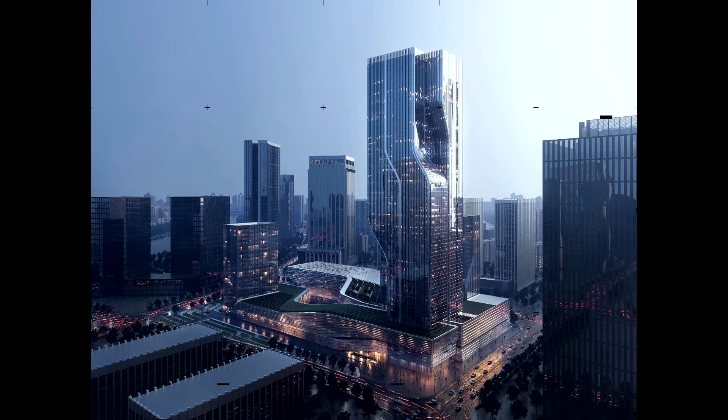And that is what I call a catalytic form, a design element that accelerates changes in the larger architectural design and its context. I will now bring you through a series of our projects exploring this idea of the catalytic form at different scales and for different project types, looking at seams and details in each one.

The first is Iwi Orthodontics, a 6,000 square foot VIP orthodontic clinic located in Omotesando, Tokyo, Japan. A vibrant and sophisticated area visited by both locals and tourists. The functional requirements of the project were complicated, and the clinic is situated in a neighborhood with stringent building codes. Our intention was to integrate the requirements and technicalities into a project with a coherent vision and elegant aesthetic.

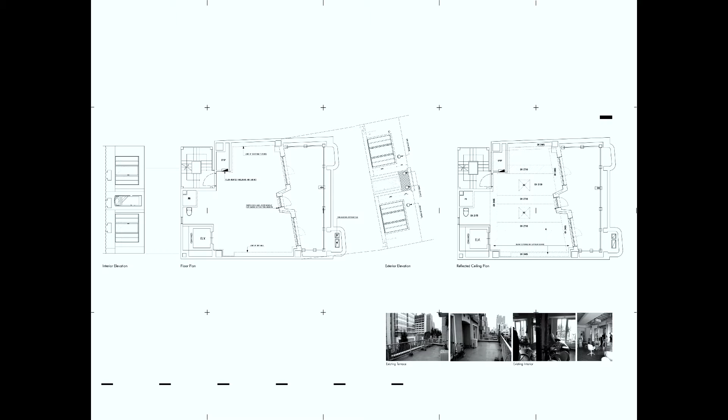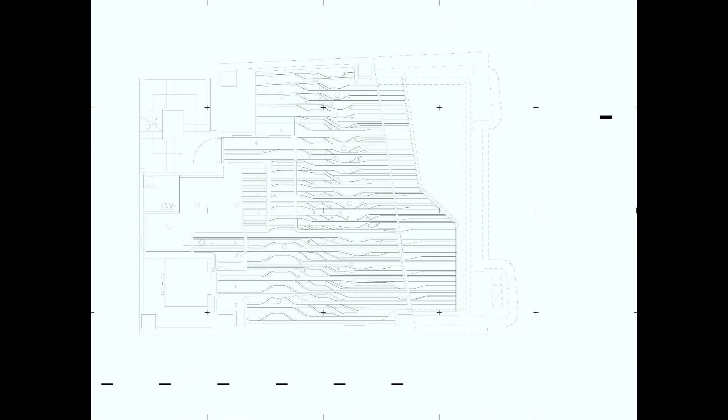Within our practice, we are obsessed with intricacy, assembly, and materiality. We have always been interested in the role of the detail in the production of an aesthetic goal. Rather than beginning the project with a form and articulating it, we conceived of the project as a series of vectors wrapping the floor, walls, ceilings, and site, which are used to define detailed material connections and assemblies. By subverting the design process, moving from detail to form, we arrive at what we hope to be novel and unexpected solutions. Here is a detailed drawing of the orthodontic exam room. And this is the reflected ceiling plan of the clinic.

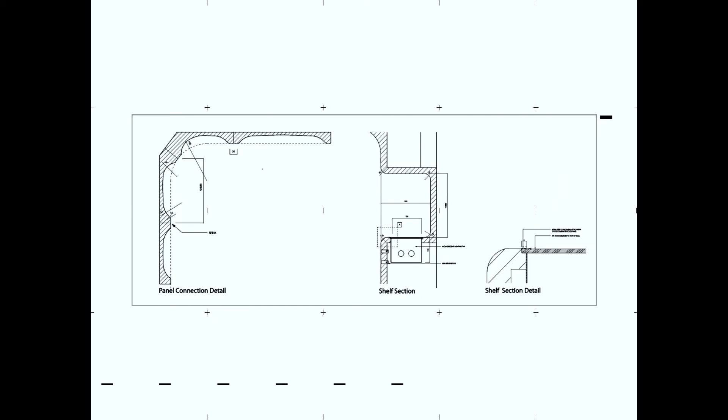The clinic is structured using steel and panelized with calcium silicate panels, free to move in the vertical dimension in case of earthquakes, that simultaneously operate as cavities for LED lights. The ceilings are milled calcium silicate panels that wrap the walls and meet more durable milled engineering wood panels. This is a mock-up of just a connection between the floor, the ceiling, as well as the LED. And as we move through, the seams are integrated with the furniture, which has the same form as the wall panels, but is made of soft foam wrapped in microsuede.

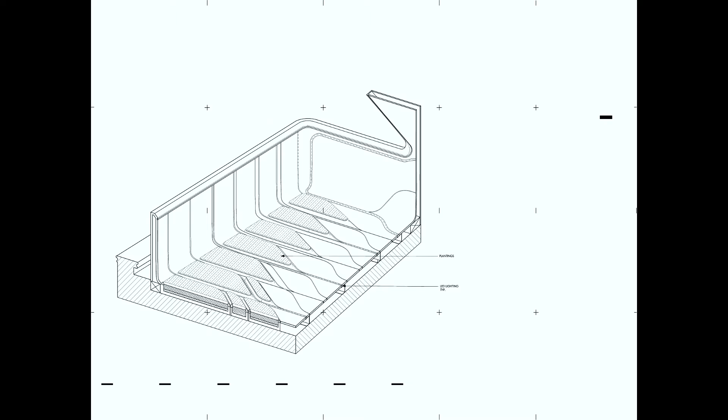So the spatial limitations that are characteristic of Tokyo in general were a determining factor in a strategy to increase the clinic scale by incorporating the exterior balcony into the interior space. And the seams in the balcony floor are porous to allow for the water to flow through the panels to the existing drain, which is at a lower level. The enlarged experience was achieved by adjusting the floor level of the interior and exterior balcony to be coplanar, creating continuity from inside to outside. And the interior ceiling also extends to cover more of the balcony, amplifying the extension of space.

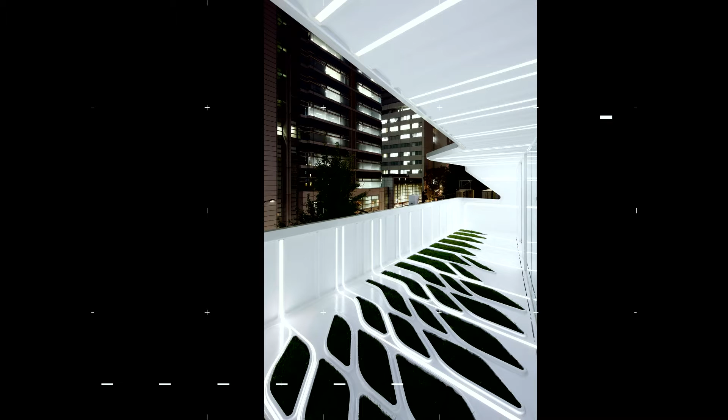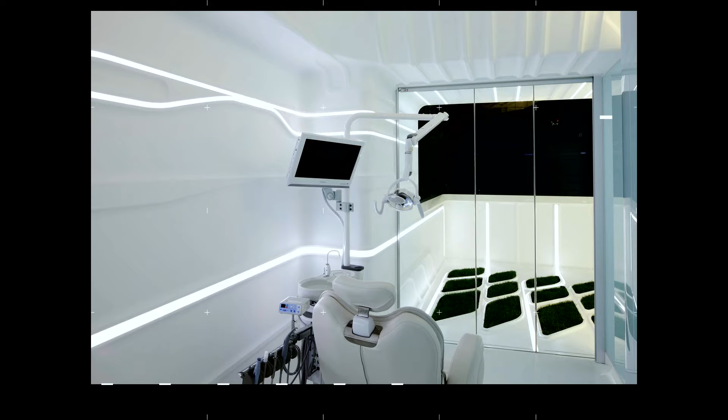Our overall design intention was to integrate the complexities of the clinic, HVAC systems, lighting equipment, and space through a few key details, which when repeated and varied across the project, drive an aesthetic sensibility. The overall variation of the project is guided by proportionality, and the magnitude of variation is maintained within an aesthetic sensibility.

The lower limits of variation were set by the amount of variation necessary to have a different experience in each clinic. Sinuous lines map the culmination of the two limits set to variation. While the white color allows the pattern to be seen most clearly and is animated by the color of the sun through the day and night, month and season.

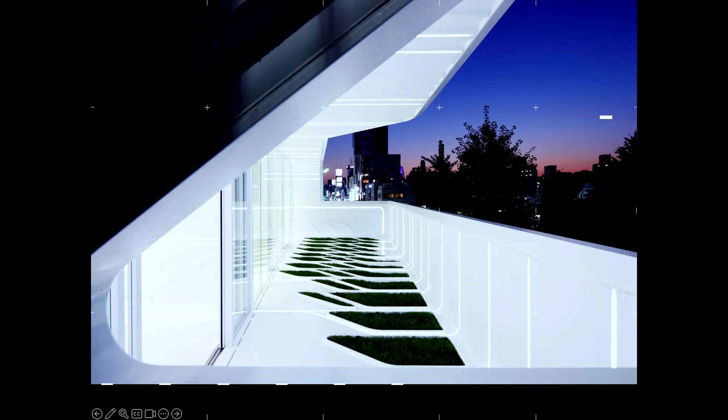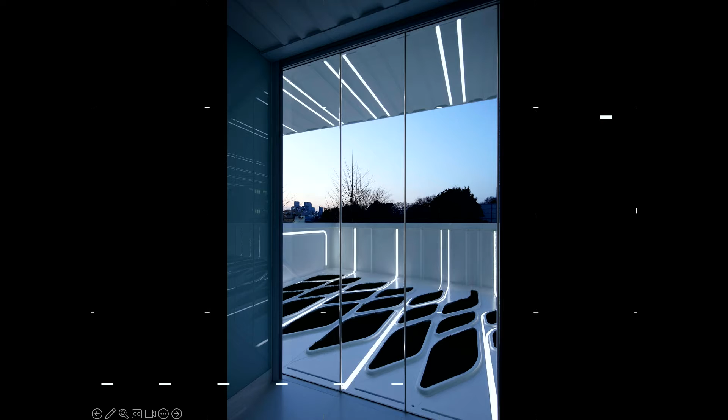And if you are familiar with Tokyo, the building in the back is the H&M headquarter building. So it's just adjacent to that street and location of H&M. So what happens is that this allows for each experience of visit to the clinic to be a new one for patients and diversifies the space for daily workers.

As the patient travels towards each private clinic, the experience is designed to be more intimate. It compresses, and the patterned glass containing multiple opacities shimmers to create an atmosphere similar to a wall of trees with the leaves moving in the wind. The only light comes from the adjacent spaces, which helps animate the space through reflection and transmittance. The atmosphere is stimulating, yet comfortable, with green glass used for the interiors and incandescent light, which softens the experience.

Here, I think you can see quite clearly the power of the seam. It can absorb all sorts of complexity, from material transitions to lighting, to embedded utilities, to seismic tolerances, and more, while driving the aesthetic of the project. This alters the logic of hiding all the necessities of architecture under the smooth and seamless form in favor of embracing complexity in the end result.

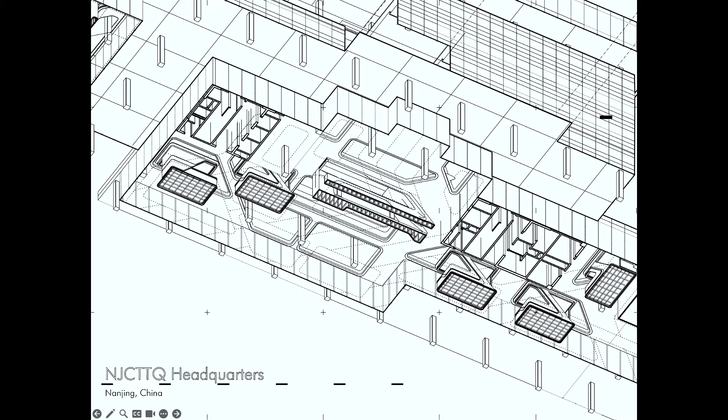The next project I'm going to share with you is CTTQ, which is a pharmaceutical company in Nanjing, China. It's a headquarter building for them. Seams play an integral role in this project as well, but at larger scales.

Our design for CTTQ is kind of a complex that sprawls across 6 existing buildings and 1.5 million square feet to diverse functions, including an educational center with auditorium, research and development facilities, laboratories, corporate offices, meeting spaces, including VIP and boardrooms, and a cafeteria that feeds 1,000 employees a day.

I will focus on how we use seams to connect and nest discrete interior architectural elements within and across the existing envelope. In approaching the project, we conceived a series of details and developed them into tailored forms. These forms are disjunct from one another, but connected through various independent devices such as floor seams and ceiling patterns. Spatial divisions created by the interrelated forms break from the orthogonal column grid of the existing architecture.

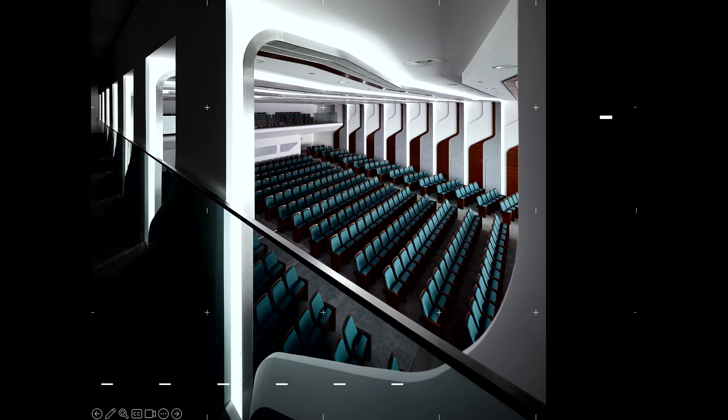As such, the construction of the building may be the same throughout, but the aesthetic goals, details, and material assemblies shift as needed. We use different methods to achieve our goals, including the development of details that conceal or reveal edges and joints. Details are crucial as they control the aesthetics of the material assembly and form. Seams accentuate or diminish the assembly. Materials nest into and layer on top of one another.

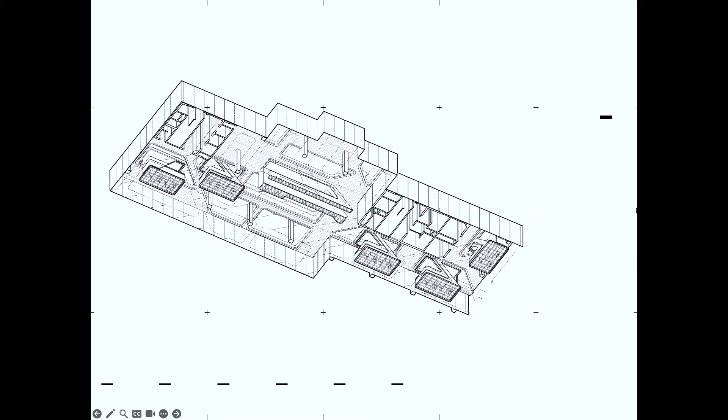Details are developed into objects, and these objects are then inserted into specific spaces. The exact techniques of assembly vary, but the goal is the same: to achieve a visually cohesive aesthetic composed of details that are both different and disjunct. This goal was achieved in 5 ways for CTTQ. The interview booth, for example, uses 4 disjunct materials at different scales. Seams move across materials and material assemblies instead of delineating them.

White Corian is nested into a frame of engineered wood. The booth is nested into a cove in the gypsum board ceiling. A gray composite is layered over the surface with an LED edge that makes it appear to float. The cove's interior is wrapped with engineered wood that connects to the engineered composites of the booth frame, but also acts to conceal the lighting and mechanical systems. The composite material reappears in the interior of the booth as a sound absorption material.

The continuity of the booth is achieved through seaming details. The seam is indifferent to changes in materiality. I think that's really crucial in this project. It moves from the gypsum board ceiling, wraps around the engineered wood and gray composite of both walls, and continues to the carpet covering the floor.

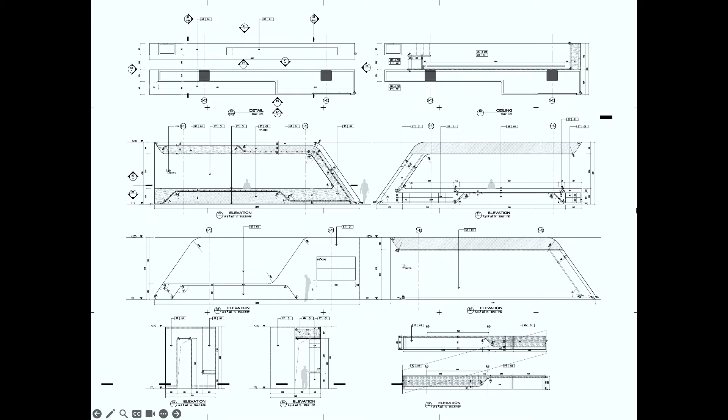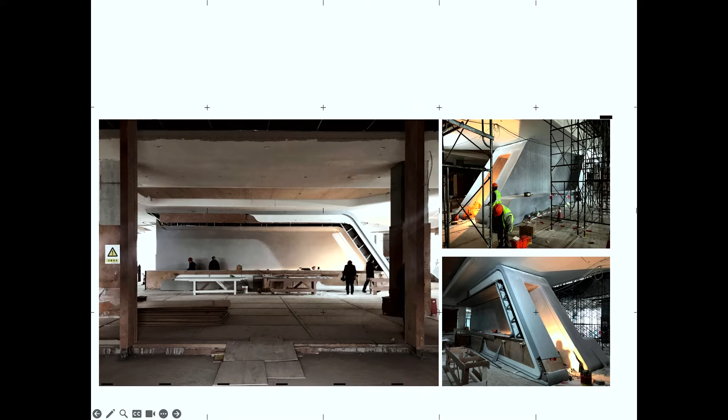The reception desk has the same material palette as the meeting booths, but is configured differently. The details of the reception desk reinforce the aesthetic theme of the project: materials nested into one another, revealed through precise detailing. And what is resultant is that the overall mass of the desk is set in contrast with the lightness of the engineered wood paneling and enhanced through a concealed LED around its edge. The thin 3/8-inch Corian cradling the engineered wood intensifies the relationship of the wood to Corian itself.

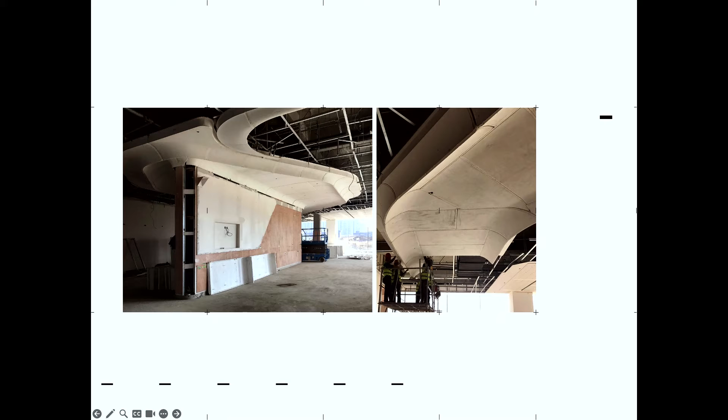Seams are also used to separate the same materials in different ways. For example, in the gallery space for exhibitions of CTTQ's products, the seams of the ceiling move across the seams of the assembled glass fiber reinforced panels. So the assembly is in one direction, the seams cross the direction to remove the knowledge of how it was built and constructed.

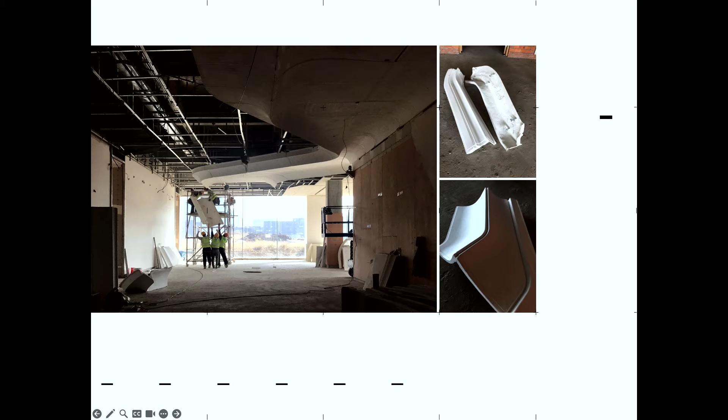The ceiling and floor details produce a floating effect, giving the space a light and soft yet tailored quality. And the resultant is what you see here. There are clear moments of continuity through the curvilinear geometry, but also moments of discontinuity where the walls disrupt the flow paths and create moments for display and observation.

The ceiling wall connection details are key to the disjunctive quality of the space. 4 walls delineate the gallery space, each of which has a nested backlit display box and acts as a gallery display space. The section of the ceiling has 2 mirrored adjoining fillets separated by a distinct groove, which creates a shadowy transition between the wall and the ceiling.

This, along with the flush lighting detail, its adjoining seam, and a larger concave section of the ceiling reinforce the nested quality of the gallery walls. These details work to both emphasize the walls as individual objects inserted into the space and enhance the performance as exhibition areas.

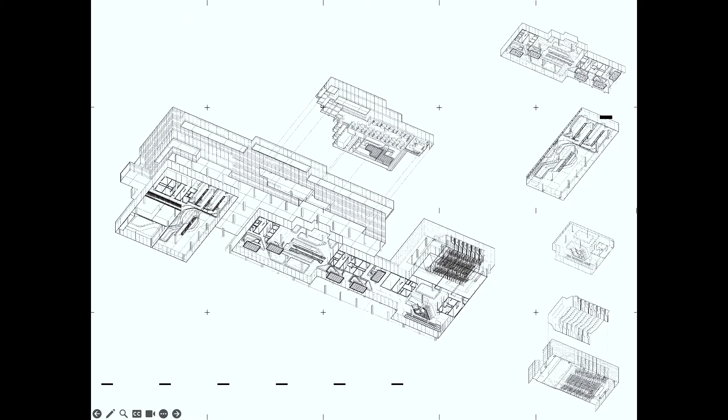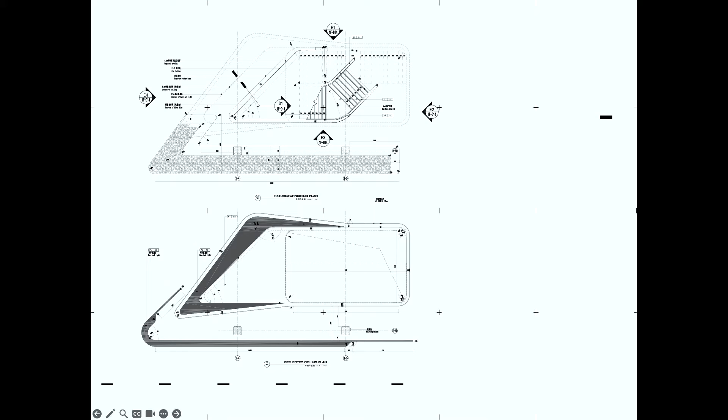And now we move to a very important part of the project because it's the connector between a lot of different spaces. And here, the seams scale up to form monolithic volumes nested with different materials. The stair that connects the main lobby to the training center is a large monolithic form, prefabricated off-site in one piece, and then installed in the space. The handrail is carved into the interior of the form, as can be seen in this mock-up image.

Three seams of varying widths located on the ceiling enhance the form's presence in the space. A fine seam of 3/16 of an inch highlights the opening of the stair. A wider seam of 3/4 of an inch masks linear diffusers, and the largest seam of 1 inch houses a light fixture that cradles the stair and nearby bench.

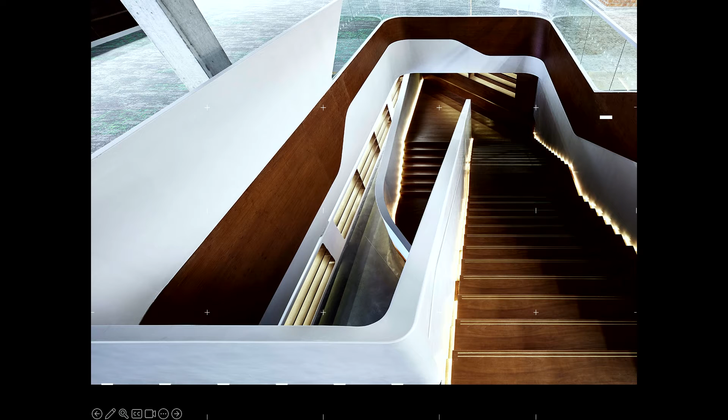Wood stairs are inserted into the interior of the monolithic form. There's a reveal designed on the edge of the stair for LED lights. And this you will see a little later, but it's an important effect that we're trying to achieve. Wooden bookcases are nested within and on the sides of the larger form. The wood profile on the perimeter of the bookcase is concealed in order to emphasize the nested quality of the wood. The stair and bench allow for the nesting of materials to amplify the space's larger volumetric qualities.

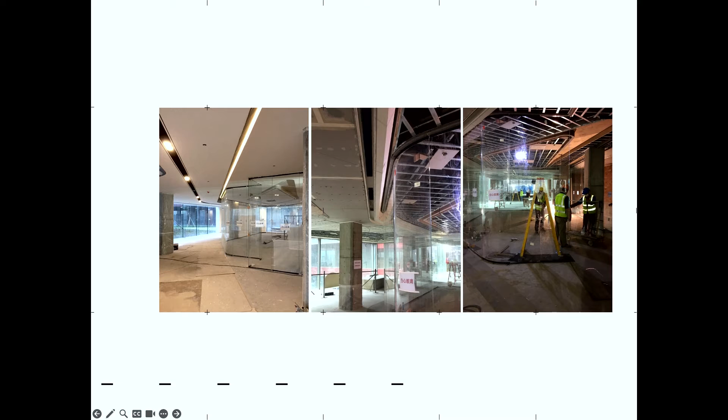Seams also shape spaces. For example, cast aluminum inset seams are used in the Research and Development Facility to separate the black and white micro-terrazzo flooring. These are mirrored by wide black seams on the ceiling, flanked by two finer black seams that contain lighting fixtures and linear diffusers. The floor and ceiling lines delineate the disjunctive office spaces and conference areas around them.

The same aluminum floor seams are used to formulate the edge of the material change between hard micro-terrazzo and soft carpeting. The floor and ceiling seams shape the elliptical spaces around them and create a sleekness that is meant to reflect the progressive nature of the Research and Development Department.

As the floor material changes, the ceiling lowers and changes in material from drywall to acoustic panels for open offices. And the micro-terrazzo floor continues and stops at the edge of the conference room, which is made entirely of flush abutted glass panels to accentuate its shape and object-like qualities. The glass conference spaces of the Research and Development Center are used to break up the open office spaces, and the slope detail around these spaces reinforces the reading of the glass conference spaces as forms nested into the ceiling.

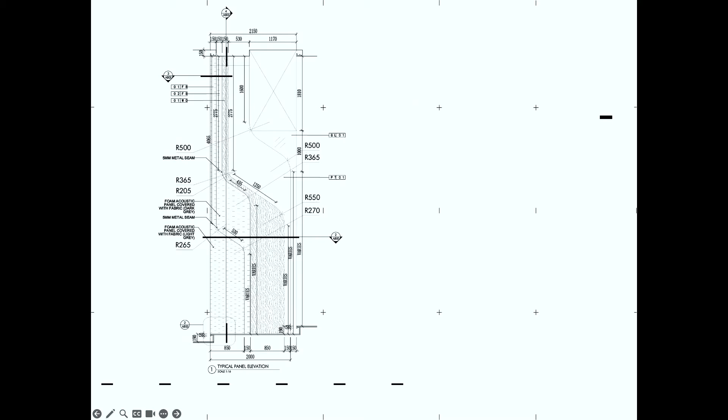So the long axis of the auditorium is shaped for acoustic optimization. The short axis has been broken down through material striation, moving transverse to the direction of form. The material striation is composed of bands of wood panels, fabric acoustic panels, and gypsum board. The drywall is flush with the gray fabric acoustic panels and abuts the wood panels. The scale of the gray panels is broken down by an additional seam moving vertically and parallel to the shape of the panel.

The seams continue onto the ceiling, where the distance between them is reduced, and widened again where they meet the panels on the opposite side of the auditorium. As the seams move down the wall and meet the floor, they continue and separate the hardwood from the carpet floor. This detail is multiplied 7 times and is highlighted by continuous strips of LED light. Each striated section is offset by the height of a stair. Each stair offset allows the ceiling to house lighting, ventilation, and acoustic components.

Repeating the section 7 times creates the overall visual impact of the auditorium being spatially disjunct in longitudinal section, yet aesthetically cohesive in material composition. And this is a view from the balcony spaces looking back into the auditorium, and a lot of the VIPs actually in China inhabit this space.

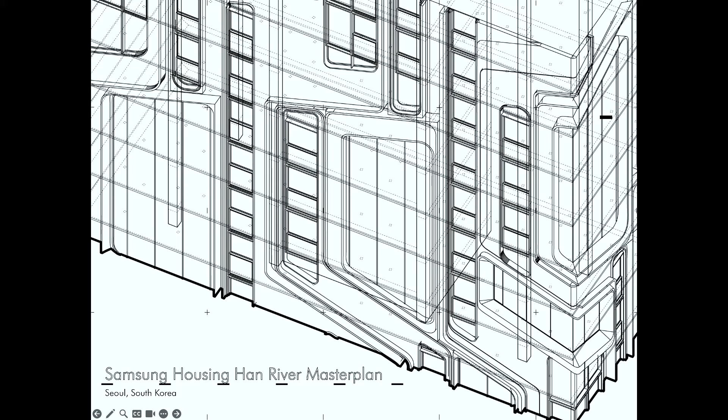One specific area of interest we have been invested in, really for complexity and modularity, is urban housing, as explored in this project. With a fresh focus on the detail, architecture can move from intricacy of assembly and nuanced spatial design to the creation of whole new architectural typology and construction workflows, or the reconfiguration of existing ones. So we were asked by Samsung Construction and Trading to formulate an 18-building master plan along the Han River in central Seoul, using predetermined building types initially created for their housing designs.

The challenge was to create significant differences between buildings across the master plan while maintaining specified building forms. This is in strict contrast to the monotonous and impersonal 20th century mass housing developments that typify mass housing in Seoul. We had several constraints, including zoning codes, unit sizes based on tax codes, and the need to create a unique facade for each building.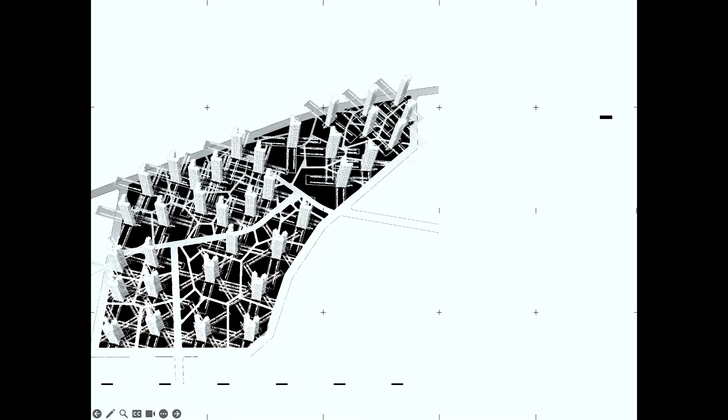In the spirit of aesthetic intervention, we sought to use a highly graphic and variable facade strategy with a deep investment in architectural performance to reconfigure the typology. A novel approach of detailing and prefabrication was essential in this respect. We sought to create a design sequence that breaks with the homogeneity of the original housing design while enhancing its attractiveness in terms of cost effectivity and construction efficiency.

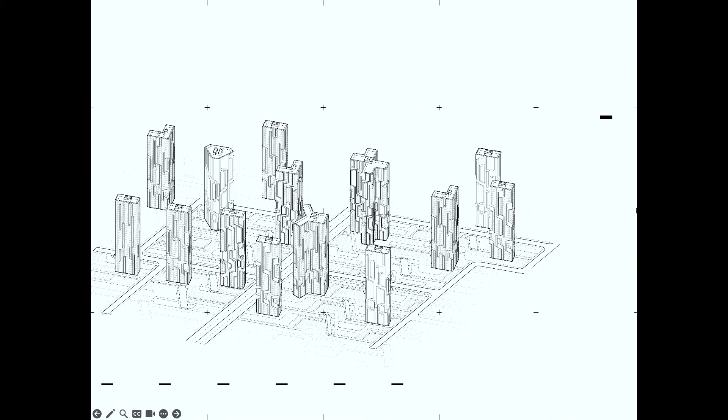As in the CTTQ headquarters project, this project is developed at several scales. The project seeks to achieve a visually cohesive aesthetic composed of details that enable different performance and programmatic criteria. This was accomplished in multiple ways, ranging from facade details to the overall master plan. To start, the facades are composed of 10 unique prefabricated frames, each with its own architectural detailing. Frames sit flush, are recessed, or protrude from the facade.

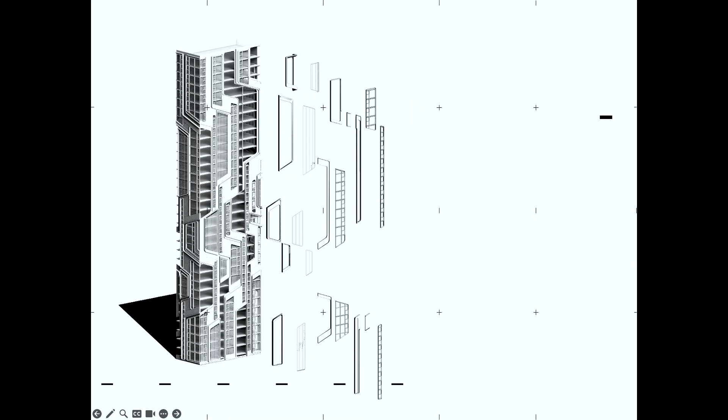The edges of each frame are either wide, narrow, or bend and become an angle. Some frames contain a seam, making them appear bifurcated. Other frames sit adjacent to or on top of one another, creating a reveal between frames of different widths. Multiple frames are also grouped together in larger frames to create nesting effects.

Further, the materiality of each frame changes depending on its width relative to other parts of the facade. If the frame is extremely wide, a seam is carved into it to give it a narrower reading while visually reinforcing the metal on the facade. When we group multiple wider frames together, we use metal as the facade material, making the building more opaque.

At the other extreme, we use very thin frames assembled next to each other to develop the most transparent parts of the facade. As frames oscillate in width, the glass to metal ratio is altered, which is aimed at giving an overall sense of cohesion and aesthetics to the building. Frame components and glazing articulate movement across the facade to enliven and enrich the generic form of the building footprint.

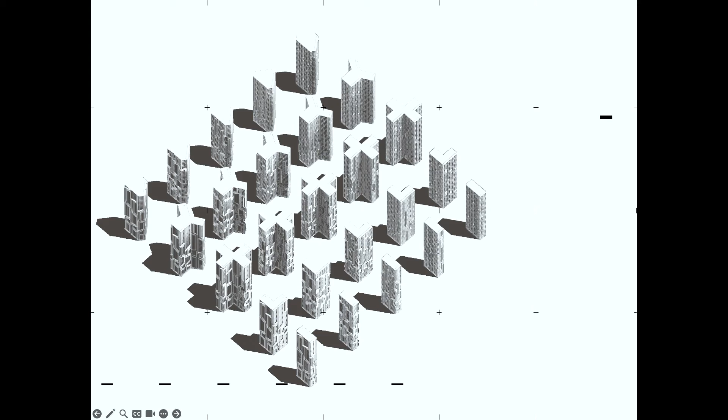All of these different facade arrangements and material transitions are enabled by a single detailing and design system. The frame components work well within the limitation of Samsung's production and manufacturing techniques. The knowledge set the limits of the amount of variation possible, yet allowed for a tremendous amount of customization in each building. By integrating and optimizing the frame design with prefabrication processes and limitations from the outset of the project, we were able to achieve cost-effective mass customized results.

The typology here, because of the need for repetition, actually opens up an opportunity to push forward new design processes with effects for both the housing typology in terms of new configurative and performative capacities, as well as manufacturing and construction in terms of implementation of new technology. By asserting mass customization at such a large scale, architecture can put pressure on the construction industry to implement technologies that it might otherwise be slow to adopt.

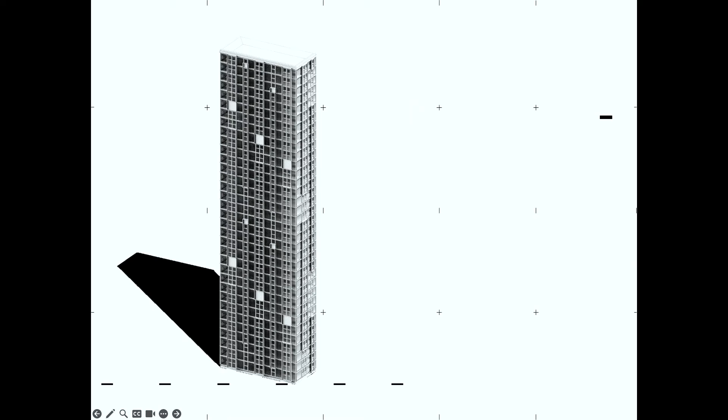Instead of one detail, there are 10, which even in the public housing realm is a readily achievable system. Because there are not one, but 18 buildings, the project is able to achieve an economy of scale. The typology provides a scenario for adapting an automotive model of manufacturing to housing. Customizable options at different scales can be swapped in and out while maintaining a basic design system and processing line.

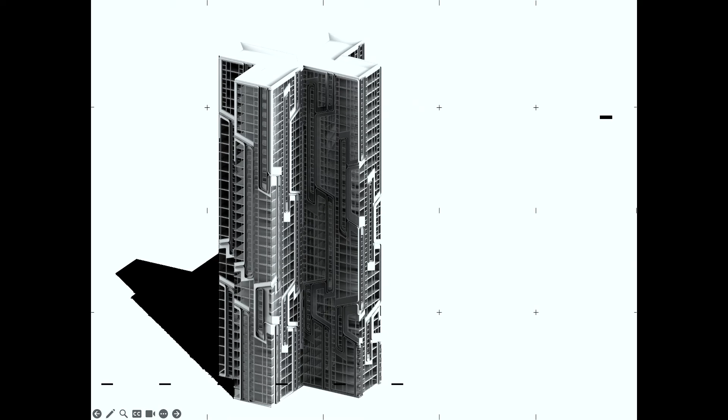This creates opportunities to vary materials in ways that enable higher level performance, whether programmatic, phenomenological, or environmental in nature. By prefabricating components and assemblies in off-site manufacturing facilities, agency and expression are given back to multiple stakeholders: to the city in terms of aesthetics, builders in terms of how they work, and residents in terms of the feel and the quality of their homes.

Variations in framing details are echoed in larger scale configurations of units and relations between buildings throughout the project. For instance, with only minor alterations to the core and chase locations, we transformed the unit organization from a static repetition of residential units into dynamic layouts with enough flexibility that they can change plan location as needed. So the buildings here adhere to strict regulations, including unit size, while maximizing the amount of variation of views and interior space within planned configurations.

Configurations were determined primarily by the locations of vertical building systems, including circulation as well as dry and wet shafts. In some cases, there are living rooms in the corner of the buildings, and other times there are bedrooms. Also, the locations of one-bedroom units and two-bedroom units change, mediating between efficiency of layout and quality of space with views. Starting from two types of units in the F, which is the flat type building, we created 6 variations across each building.

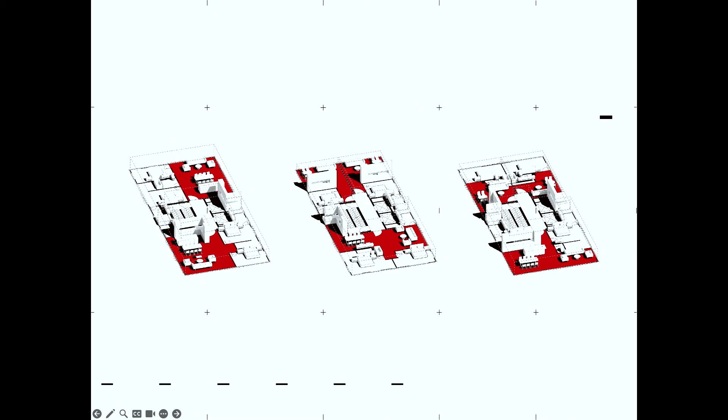These unit types were developed per building, and their locations in the plan correlated to core and shaft location and design. Plan configurations also shift across multiple buildings. In particular, unit configurations correspond to the proximity of adjacent buildings to create a dialogue between buildings and maximize both views and privacy. The location of chases provides us with opportunities to alter kitchen and bathroom layouts, maximizing views for each residential unit. In sum, the tectonic design gave Samsung flexibility in how they located units.

The interaction between the facade and the variation of units developed nuance for each residential unit in orientation, elevation, and window performance. The facade brings in light in different ways, frames specific views, and makes strategic areas of the unit more opaque or transparent than others. The combination of strategies gave us 64 different unit plans per building. This enables the resident to select from a menu of features for each unit, as well as height above the ground, unit orientation, unique window features, and views. Each unit affects the layout of the building next to it.

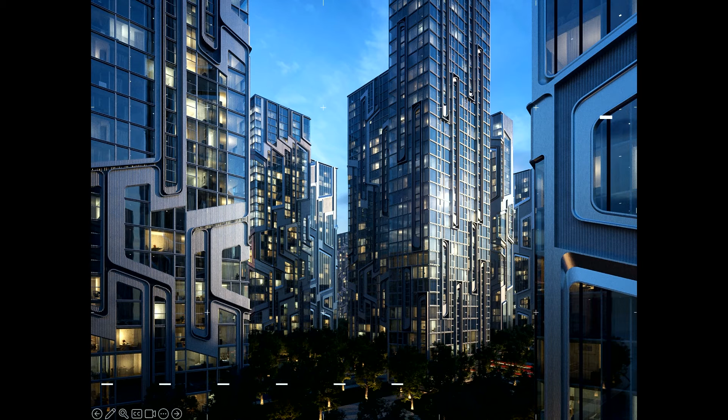This produces a master plan with a look and feel based on floor-by-floor regulations and repeatable customized components rather than generic mass-produced building-to-building relations. The plans and elevations appear disjunct, yet they are tied together by the underlying tectonic and aesthetic logic of the building as a whole.

Our strategy was to use these constraints and develop the most efficient master plan possible, tying the discontinuity between building forms together with landscapes of similar elements at different scales. The master plan then incorporates all the programmatic and zoning codes required to maximize views and quality of light for mid to high-rise development.

We reassessed the value of a large central recreation area for the entire community and developed several micro-community recreation areas around smaller zones. This reflects the effort to create more localized architectural moments in the facade and layout design. The micro-community areas likewise acquire their own particular qualities and identities in relation to the building and landscape variations around them.

The project recognizes that certain efficiencies and building construction workflows are needed to meet the pressures of urbanization, affordability, and densification. It shows that deeper understandings of typology and its material and social performance can be achieved by engaging it with more intelligent and nuanced design systems and procedures that are centered on the detail. It allows for a diversity of localized architectural experience and individual expressions of identity, while putting forward an overall expression of technology at urban and global scales.

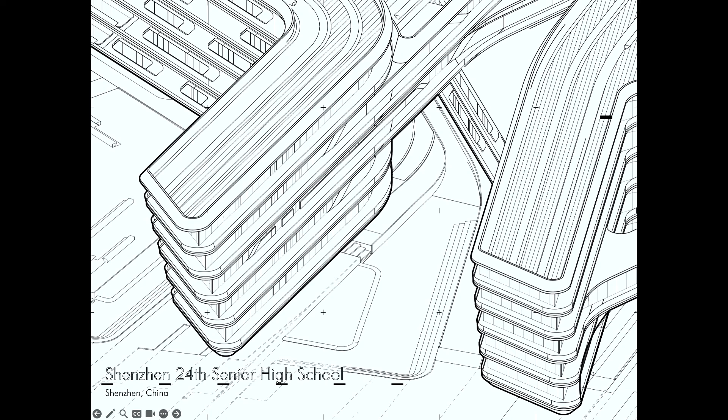In the next project, designed for a high school in Shenzhen, China, we used some of the same detailing strategies from the facade design in the Samsung Housing Han River Master Plan, but deployed them in a horizontal building type that integrates closely with exterior space and landscape design. Shenzhen 24th Senior High School is a 904,000 square foot educational facility and landscape design in Shenzhen, China. Due to the temperate climate in Shenzhen, the classrooms are able to be consistently engaged with the landscape.

The project seeks to engage architecture more directly in the act of education. It presents students with a kinetic architectural language that makes no reference to a traditional school typology, but rather looks elsewhere to encourage student inquiry and provoke curiosity. We explored the hybrid territory of a site wherein building and landscape is perceptually interchangeable.

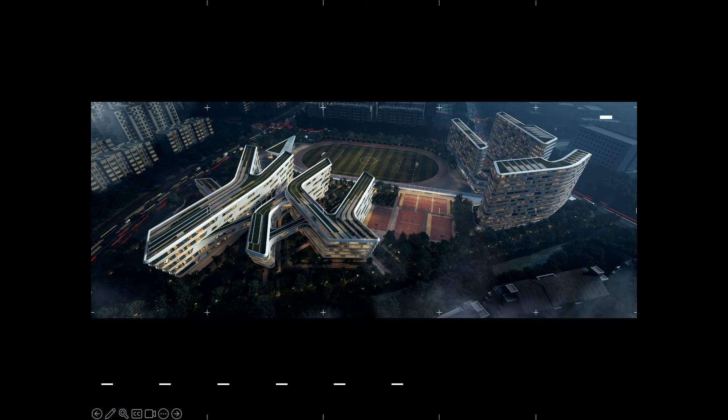Much of the circulation, instead of being located on the interior of the building, is pushed outwards to open-air terraces and building bridges, which simultaneously serve as shading strategies and canopies for adjacent spaces below. This type of constant interfacing with the outdoors provides a contrast to normative typologies where students are expected to be inside all day until lunch or physical education times.

The site plan defines clusters of semi-independent academic building units that each integrate a full curriculum segregated by a plinth level to foster team teaching in a more intimate educational setting. A row of interlocking forms are set on one side of a long central street, which cuts through the campus and serves as an organizational element. Seeking to create a counterpart to the suburban context, the sense of urban experience is intensified by the compression of the street, which leads you to the athletic and residential campus on one side, while it moves you to the STEAM building and amphitheater on the other.

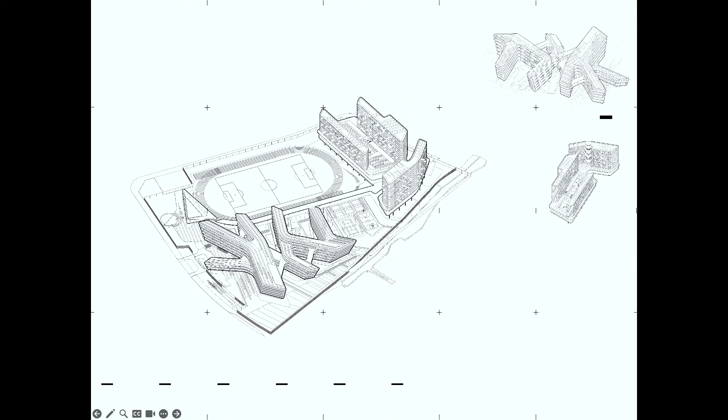We formed the main 6-story academic buildings on an east-west line and then connected them in areas to create more intimate space for the outdoor classrooms and to maximize light in the classrooms at different times of the year. The project applies a prefabricated steel system. It utilizes 2 different structural systems, box trusses and a regularized grid system, to achieve different purposes in the campus.

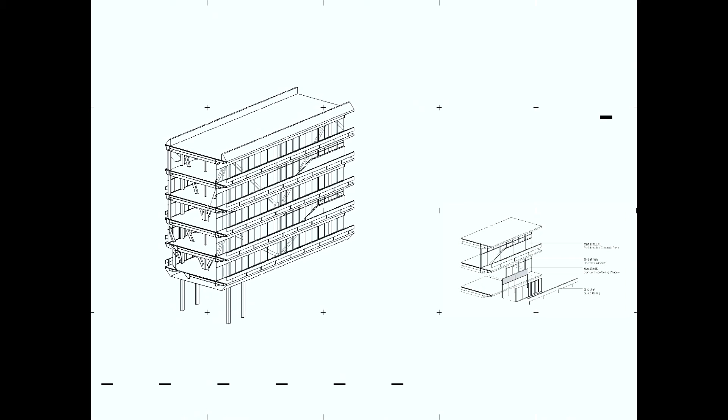In the academic buildings, the bars are primarily structured using box trusses, which are the most efficient structures to span slightly longer distances in buildings. All members are standardized and are fabricated off-site and erected on-site easily. A building bar consists of 3 layers of structure: a main grid structure, main truss structure, and secondary filler beams. All floors are made of prefabricated composite slabs. The entire structure sits on pile foundations at the base for all the buildings.

The south side of the academic building includes an exterior hallway. The 2-meter-wide hallway provides a deep shade for preventing direct sunlight. On the south facade, we provide 6 types of prefabricated units that can assemble with standard floor, ceiling and glass to provide different facades to respond to the interior program.

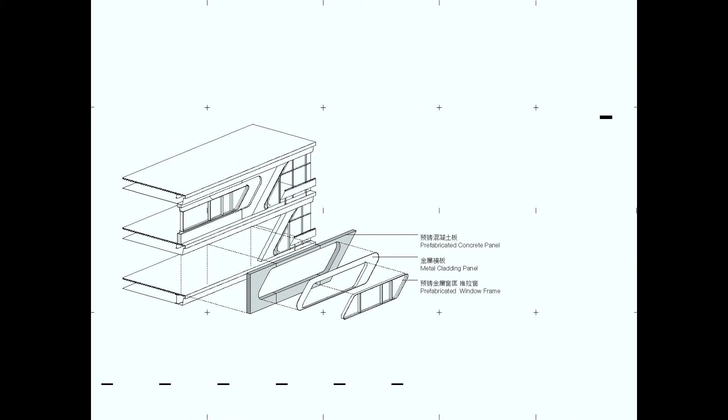And the north sunlight provides the best natural lighting source for the academic buildings. To obtain the most amount of sunlight, there are 4 types of prefabricated units that assemble with 2 sizes of horizontal operable windows according to the interior programs. The north facade is open with more glass to provide soft indirect lighting for study spaces.

The dormitories are created to formulate a clustering of residential buildings that frame the athletic facility and allow for maximum light at different times of the year. The faculty dormitories towards the south are 8 stories and lower than the 12-story male dormitory, while the female dormitory on the east of the site is 13 stories tall.

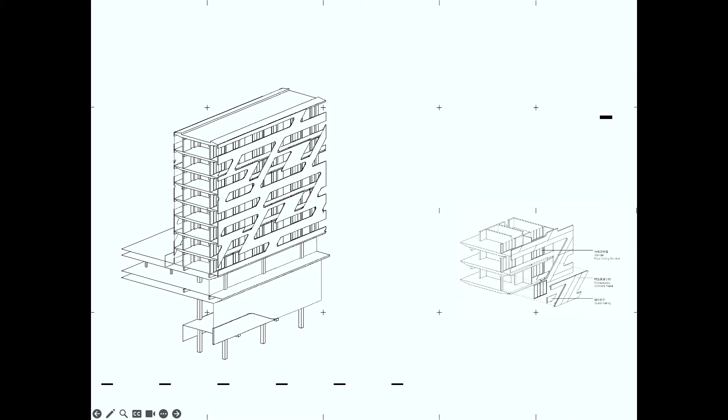The dormitory facade features a simple and effective system that forms an essential look of the campus. The facade is modularized into 4 types of units, and the dormitory complex is the tallest building on the campus. The whole structural system uses the most common and efficient steel grid. Additionally, the interior and exterior are designed to achieve the goal of 100% prefabricated assembly. With the same site condition, the dormitory complex also uses pile foundations as a base for all the buildings.

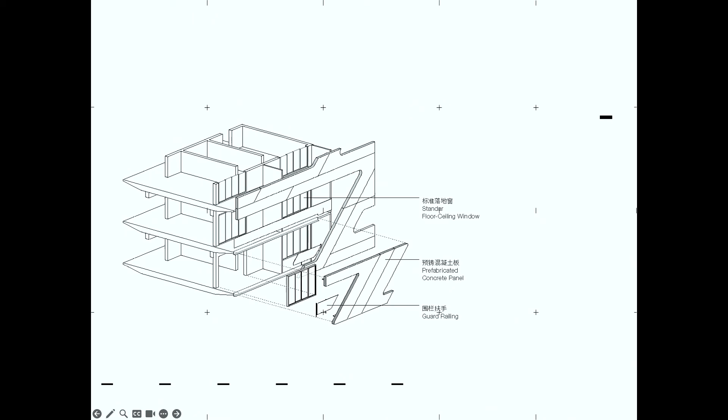Stairs connecting the plinth level to the track, raised planters, and edges of water features to sit on, in addition to stairs for each landscape courtyard, are facilitated by the wide stairs that allow for students, teachers, and administrators to sit and lounge on them as they wish, including meeting for classes or reading. The bridge above creates intimate courtyard spaces below because it provides a shadow buffer between the spaces, so you can have multiple classes meet at the same time.

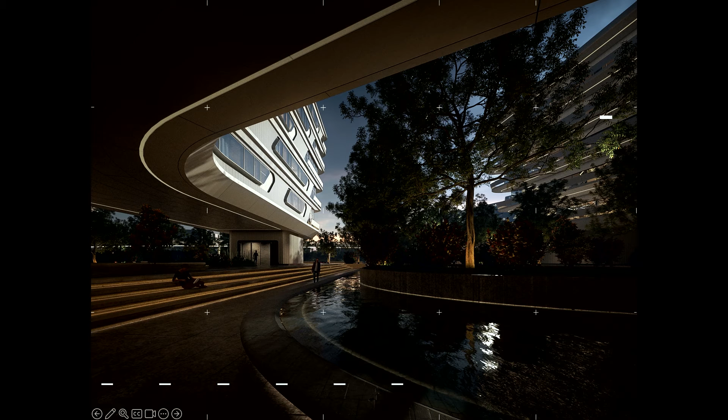Landscaped outdoor teaching areas act as courtyard buffers between buildings and punctuate the classroom units with views of plantings and sky. Overall, I hope the project shows that a contemporary approach to detailing and material assembly in a cost-effective manner applied to a deeply ingrained typology can impact the architecture and the types of social interactivity that characterize education more generally, or other sectors for that matter.

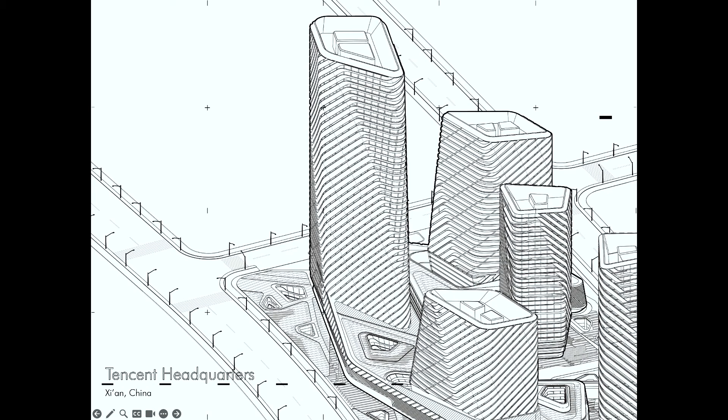For the next project, Tencent headquarters, a 2.7 million square foot headquarters building in Xi'an, China, we wanted to shift the scale of the generative aesthetic techniques in the previous projects to larger, multi-building and urban scale assemblies and organization. Xi'an is notably dusty, if you've ever been there, and also home to the terracotta warriors. We wanted to create something striking and resilient to serve both the identity of Tencent's brand and the character of the city.

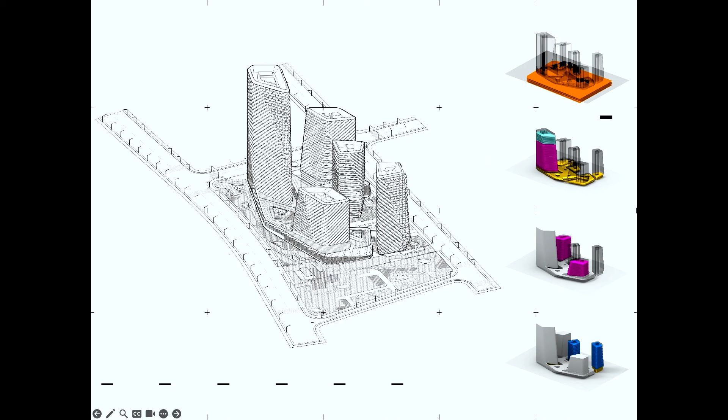The project features 3 levels of retail embedded in the ground floor plinth, 2 residential towers, 2 office towers, and a large tower split between office and hotel spaces, all spread over an entire city block. The integration between programs was challenging and required an innovative approach to create a cohesive design and produce a unique landmark for the region.

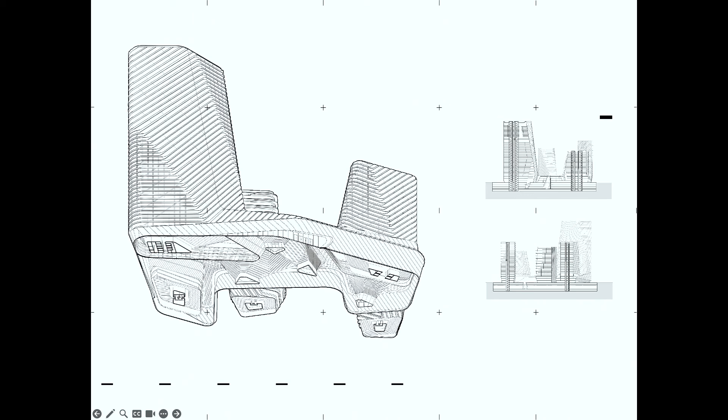Here, macro-level seams from the building's forms run across the site, delineate shifts in program, most notably on the ground. They expand into terraced large atria carved into the plinth, which provides light, air, circulation, and thresholds between indoor and outdoor spaces. As one moves around the building and its urban context, the forms are meant to change their expressions, creating a unique and dynamic project from every angle. The formal opulence of the building is constituted by creating a genealogy of formal features that are at once distinctive yet interrelated.

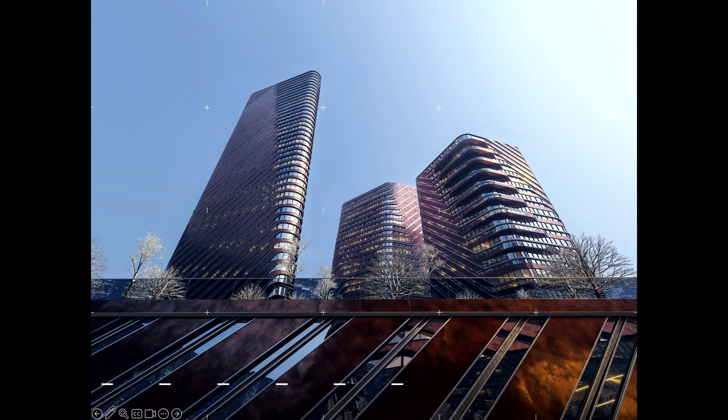The detail of the terracotta panels, in contrast with the aluminum edge, heightens the dynamism of the form when illuminated with sunlight. The detail also provides the disjunctive nature between the buildings without compromising the overall brand aesthetic for a world-leading high-tech company. And if you are familiar with Tencent, or if you communicate with any Chinese students, you will realize that Tencent is the owner of WeChat and a very powerful company indeed in China.

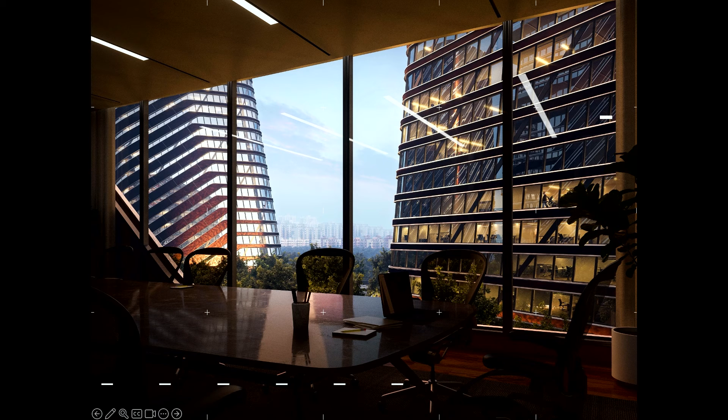The facade detail wraps around the building volumes, changing width and direction in accordance with shading needs, program delineation, and circulation strategies. At times, the detail expands outward to create terraces on the building faces. The repetition adds dynamism and variation to what could be otherwise a monolithic and imposing site.

Across the site plan, courtyards are formed starting from different levels by the expansion and contraction of the volumes and seams. The courtyards provide light, exterior accessways, terraces, and green spaces throughout the interior of the project. The aim is to provide a diversity of outdoor spaces in terms of size, spatial quality, and program adjacencies, which inflect the interior with difference and a sense of discovery as one moves between different spaces.

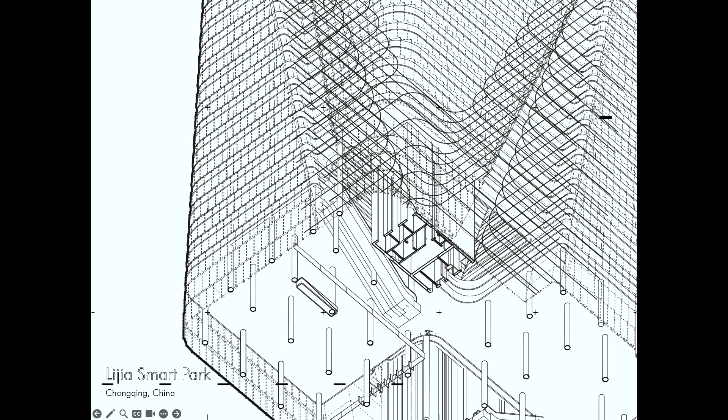Now I'm going to turn to our winning design for Lijia Smart Park, a 126-acre development in Chongqing, China, which is currently under construction. In Lijia, all of the techniques from the previous projects come together in a multifaceted master plan. Chongqing is a subtropical city with a beautiful natural location set among dramatic mountains and the intersection of the Yangtze and Jialing rivers.

The site of the project is a microcosm of Chongqing with its steep hills and large topographic drop to the Hongzai Park. The project comprises two sites adjacent to Hongzai Ecological Park and surrounding the Hongya Reservoir, which is in the center of our site. The smaller site shown here to the right is currently under construction and includes a subway that is actually running right through the site, which you can see.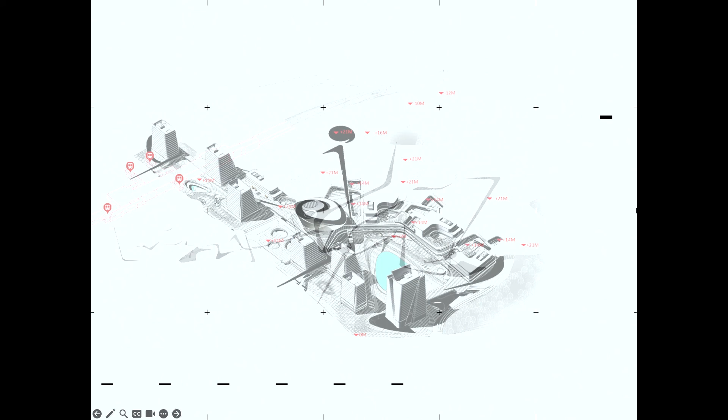Calligraphy was used as an inspiration and aesthetic device for organizing the site. The calligraphy lines in the master plan traverse, turn, pause, lift, press, and outline. The calligraphy lines register key nodes of circulation, common areas, and building forms. This allows the project to develop a sense of place and has meaning nationally as well as globally.

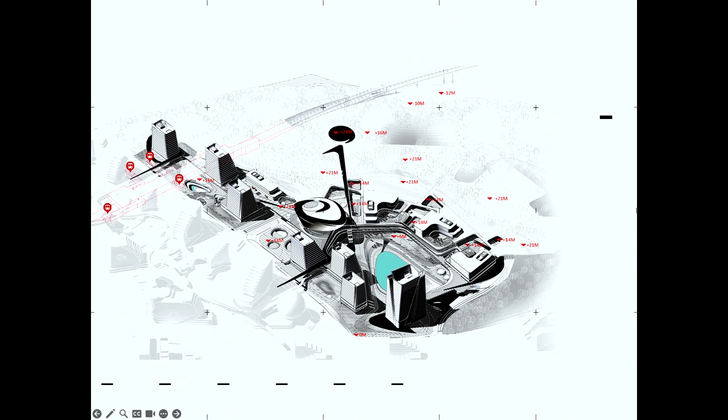The master plan itself consists of 13 buildings on a plinth that connects all the buildings together into a cohesive form. It includes 8 office towers, 4 research and development buildings, and the centrally located Big Data Museum. The green connection is important to the cohesion of the overall master plan vision. It contains landscape features with hard and soft surfaces, seating areas, plazas that establish an impactful urban experience for all the people who work and visit the area.

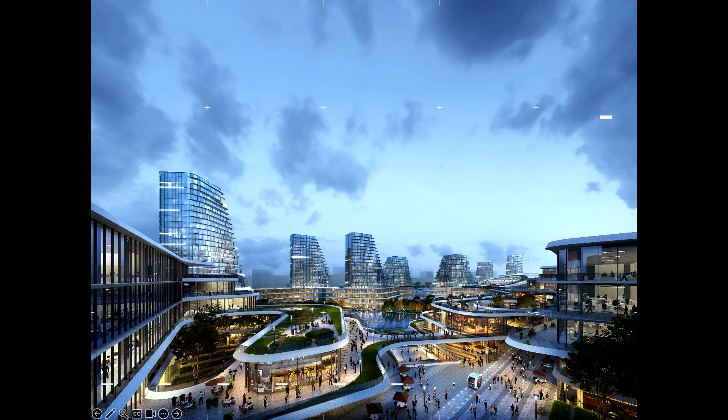It is achieved through careful coordination of surface textures, detailed transitions between softscapes, hardscapes, and building forms, a unitized paneling system in the towers, and repetitive design elements. Here you can see how the vertical detailing of the calligraphy motif on the building facades works together with the circulation paths across the site to create a cohesive architectural language.

The sinuous nature of calligraphy decentralizes collective form making. Spatial and performative variations spread across the site for different purposes while maintaining a sense of collective identity and place that is simultaneously decentralized and dynamic. The morphology of the project responds to the dense gridded city to the north and the park to the south. Along the north edge are 8 gridded high-rise office towers that undulate in plan and in section. The south side consists of interconnected terraced buildings and landscapes that respond to the soft edge of the lake and Hongzai Park beyond.

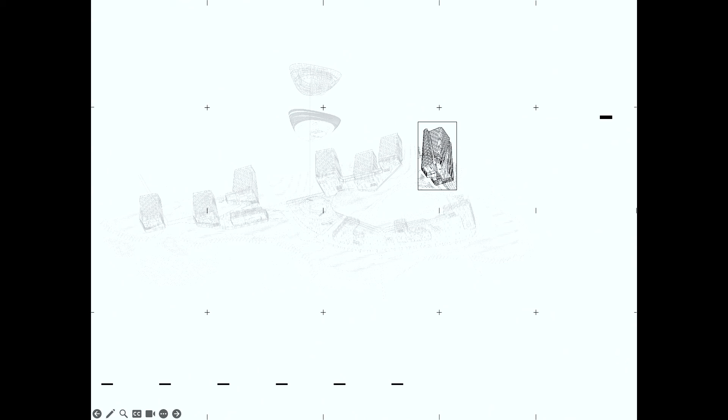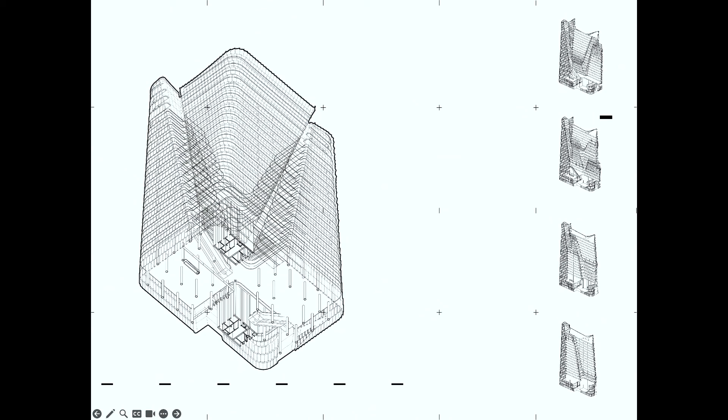The towers all use the same construction methods and details. However, great variation is achieved by keying specific details into different parts of the site. The tower facades are designed using white frosted glass with minimal details and are highlighted with brush strokes of dark translucent glass. The dark strokes are offset from the facade surface to create a greater sense of depth and articulate programmatic shifts, and the carving is 3-dimensional and sculpts into the interior of the project.

The calligraphy strips of glass that are dark during the day and illuminated at night break up the continuity of the surface and reduce the perceived scale of the building facades so they reflect the overall context of the master plan. Chamfered edge details on the floor slabs add to the sense of overall lightness in the structure. The window panels are all identical, but the design of the frame detail allows them to rotate in multiple directions. This enables the creation of variable surface textures and geometry, and it allows for the fine-tuning of environmental performance criteria.

These breaks in form are carefully coordinated and detailed with the unitized paneling system. The repetition produces an overall elegant effect where the large-scale surface disruptions acquire an organic feel and flow. This adds lightness to what otherwise would be an imposing form and creates a tremendous amount of surface differentiation and elevation in terms of texture, light, and composition.

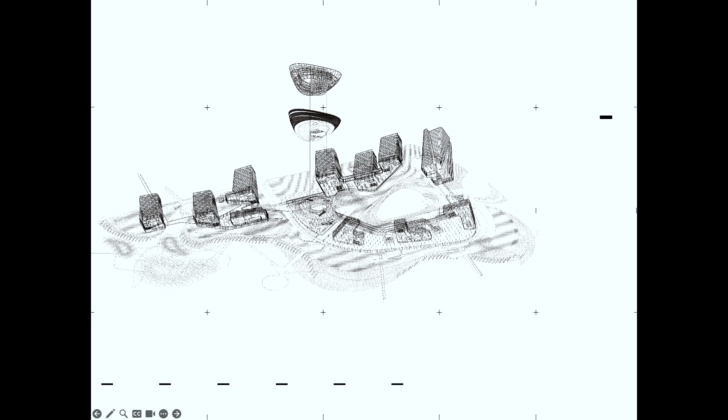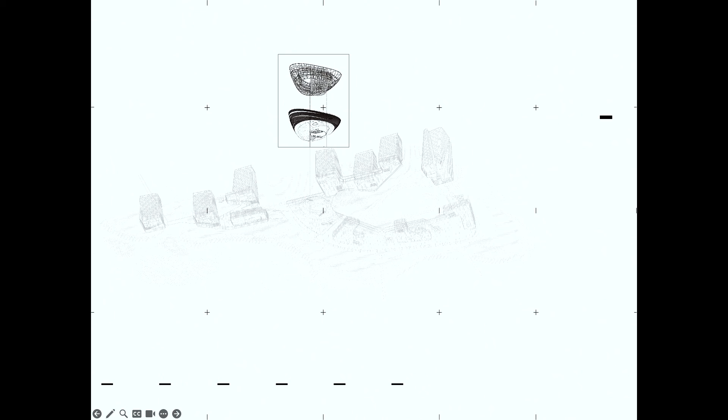The 215,000 square foot Big Data Museum sits at the nexus of the calligraphy, wrapping the site, and serves as the brain for the smart city. The smart systems of mobility, utility, communications, and infrastructure are integrated in the building. As one enters the museum, the progression up the building reveals the exhibits. The crowning moment is the skylight that brings in natural light. A key component of the museum is to show how the smart city works through the central control center display, while the perimeter features incorporate cultural components.

The edges of the building are lifted to reduce the mass of the volume. It is cantilevered and features a large-scale LED screen fitted to the form on the underside. This can be seen from the subway and throughout the site and gives passersby a glimpse of the interior and attracts visitors. Like the other buildings on the site, the calligraphy is carved into the facade, adding surface depth and variation. These also feature additional large format LED strips.

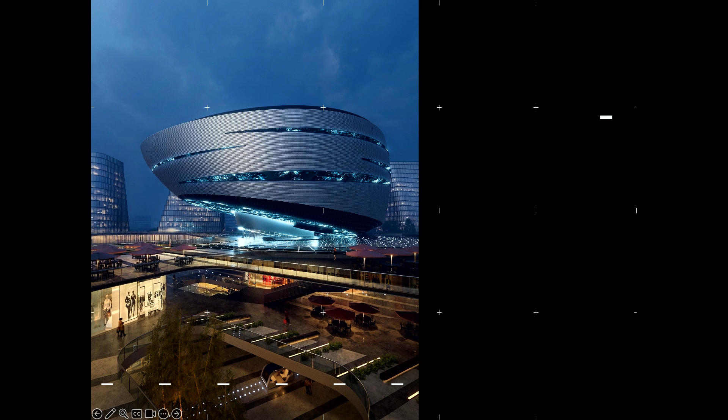The surface of the building is clad in metal strips whose seams create a sharp and distinct texture with its own shimmering effects. We multiplied the seams 7 times in CTTQ for the auditorium. We multiplied it 150 times to the surface of the Big Data Museum. So the seams, again, begin to really enable a reading of this soft surface just because of how much detail it has in it.

Chamfered edges in the canopy overhangs reference and culminate in the form of the building. The whole large site cross-references and integrates seams and chamfers to reduce the visual appearance of the plinth levels.

Don't worry, we're close. We're close to the end.

The texture of the building as a whole strikes a contrast with the surrounding panelized towers, varying experience of the site as one moves throughout. Overall, the interplay between textures, seams, and repeated assemblies across the site show how working at a small scale, moving from detail to form across the master plan, creates unexpected synergetic spaces.

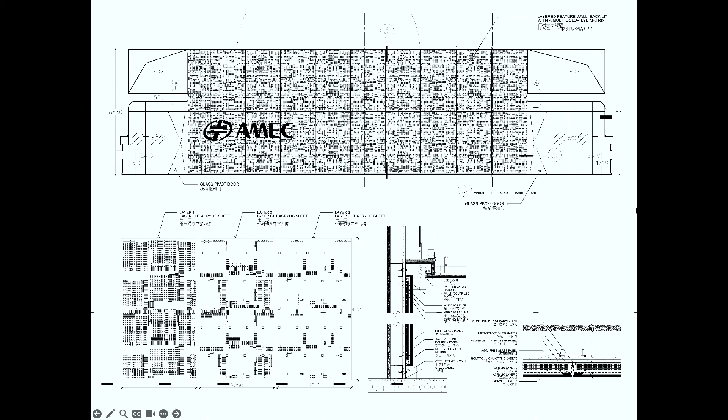What I want to emphasize in these projects is that the designing of the detail puts a tremendous amount of power back in the hands of the architect. If we just focus on form and leave all the devilish particulars of how to put a project together to software default and other disciplines, we're not taking full responsibility for what we create. Without a robust stance toward assembly and materiality grounded in the disciplinary issues, architecture shaped by new technology will become irrelevant. You could probably argue it already is.

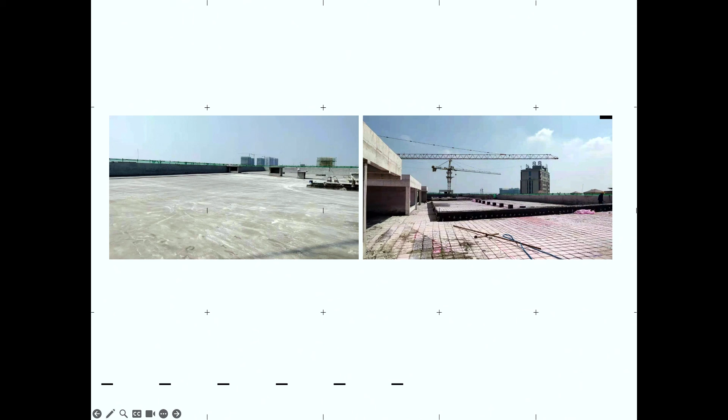I think our projects demonstrate how a rigorous investigation of seams and details can be fruitful starting points for initiating a project. The method can yield striking results at multiple scales, whether in defined connections between interior wall panels, nuanced material transitions in assemblies, innovations in facade detailing, reconfiguration of existing typologies, macro-level site contouring and definition, or in urban scale master planning.

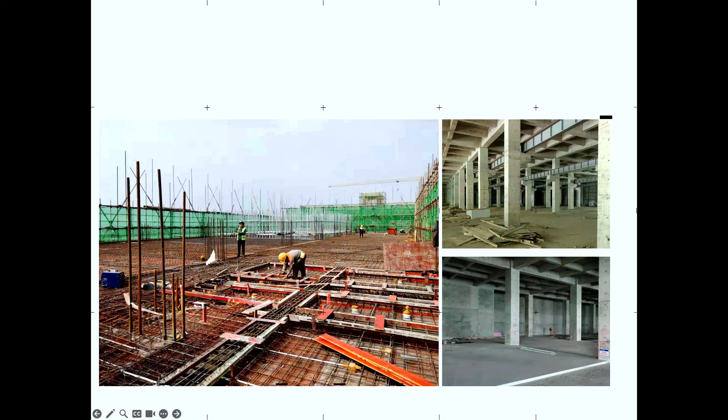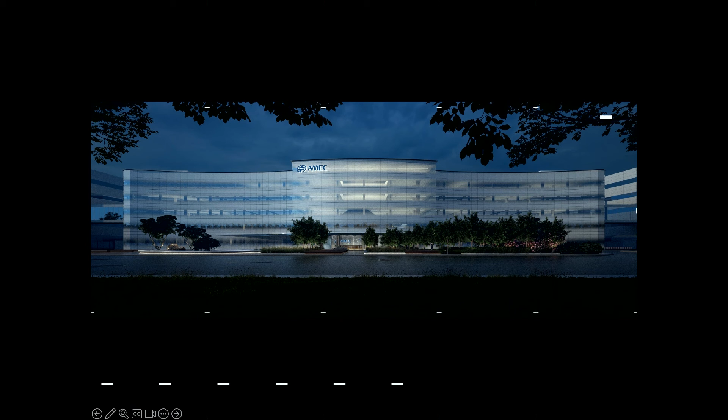Moving from detail to form also fosters new collaborations with manufacturers and fabricators. It puts a productive constraint in the design, which also ensures quality all the way through the construction of a project. It keeps us focused on creating something novel, and by doing so, restores potential in catalyzing new social, cultural, and environmental forms. Thank you very much.